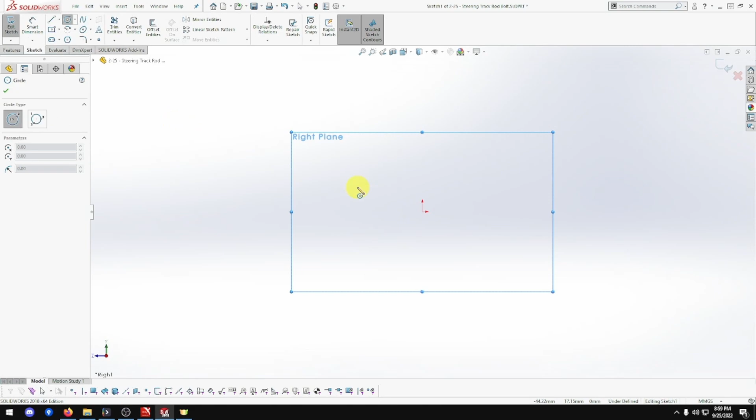Center point, that's going to be 10 mil. That's going to extrude 19 mil. Done.

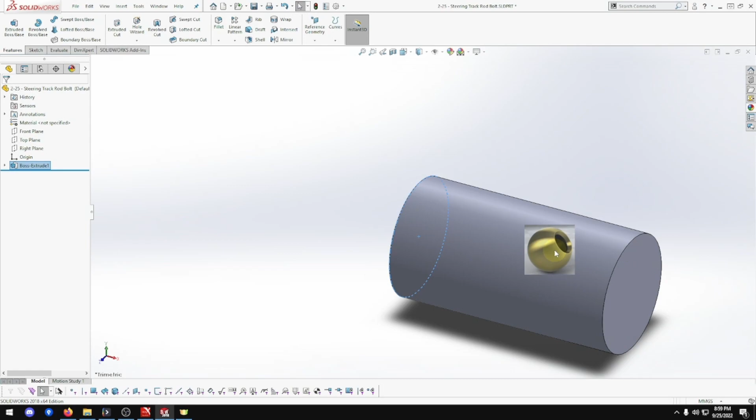Got some beautiful color on there. Sketch on that plane, circle. That's exactly what we've done for, just different dimensions.

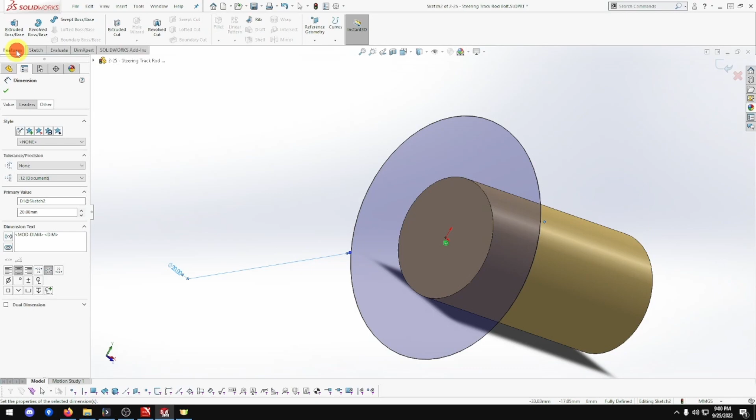So circle, that's going to be 20. Okay, that's the same. And that's going to be 6. Extrude 6. Nope, not 7. 6, there we go. Done.

Then on the end, this one, it's going to be sketch, circle, exactly the same. And that's going to be 8 mil.

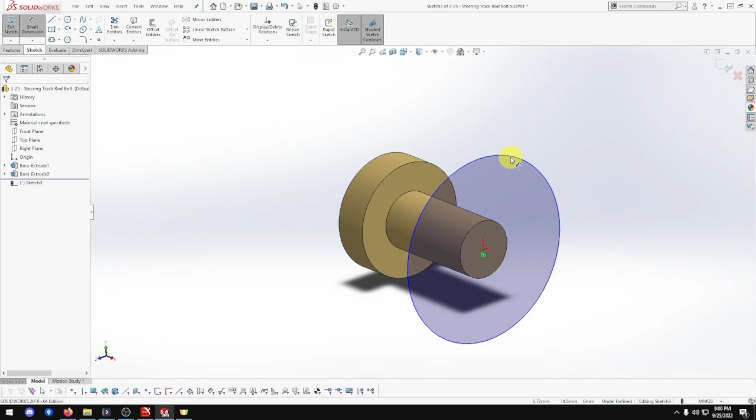Otherwise, I do such big circles, that way I know exactly where it is. I'm not getting locked on anything. So I normally do things like that.

Alright, let's try and move that down. You can actually grab that and... nope, not that one. Grab the end there, you can actually make it different sizes. What about that? I'll control Z and undo it. But yeah, if you want to do an adjustment, you can always do that. But I think it's just easier to type it in.

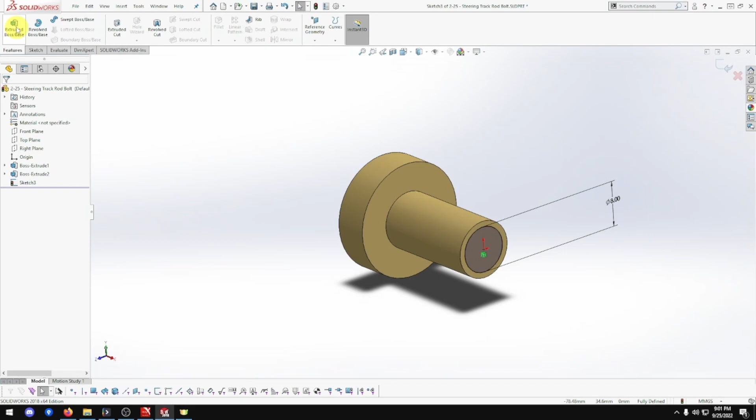It's going to be extrude feature, extrude 7 mil, and done.

And that's going to be a Hole Wizard thread. First point there, up to selection 2, next point there, and that's going to be M8, not M10.

We want M8. So back down here somewhere. That's M8, there we go. 8 by 1.25, and done.

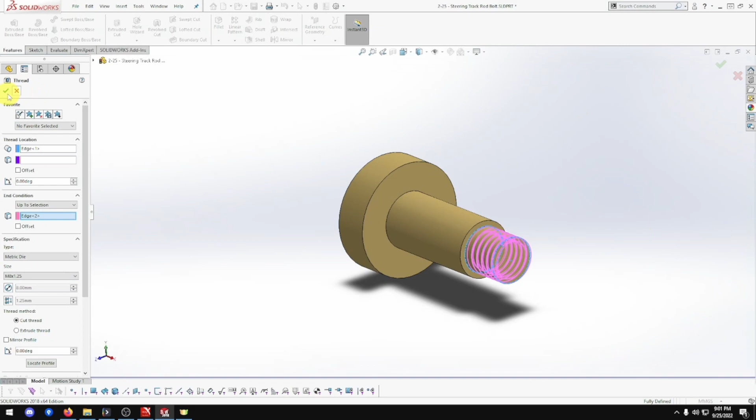And that's part 2-25 steering track rod bolt done for the Clayton Undertype steam wagon.